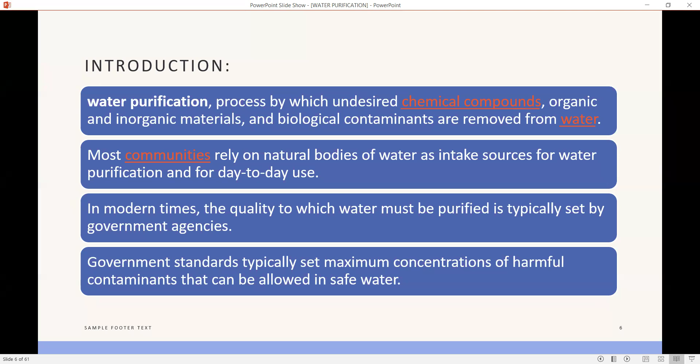Introduction: water purification is the process by which undesired chemical compounds, organic and inorganic material, and biological contaminants are removed from water. Most communities rely on natural bodies of water as the source for purification and for day-to-day use. In modern times, the quality to which water must be purified is typically set by government agencies, which set maximum concentration of harmful contaminants allowed in safe water.

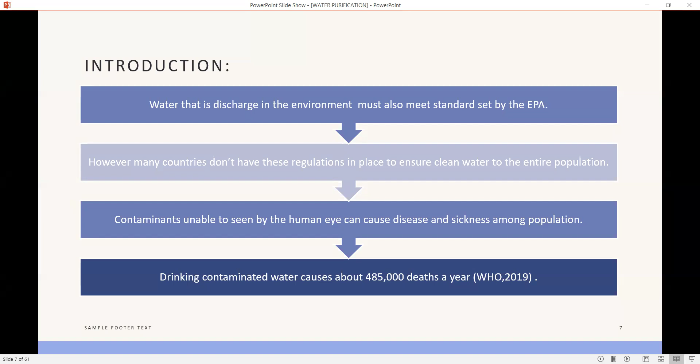Water discharged into the environment must also meet standards set by the EPA. However, many countries do not have these regulations in place to ensure clean water to the entire population. Contaminants unable to be seen by the human eye can cause disease and sickness among the population. Drinking contaminated water causes about 485,000 deaths per year, according to WHO.

Not all people have access to safe drinking water. According to a 2017 report by the United Nations World Health Organization, 2.1 billion people lack access to a safe and reliable drinking water supply at home.

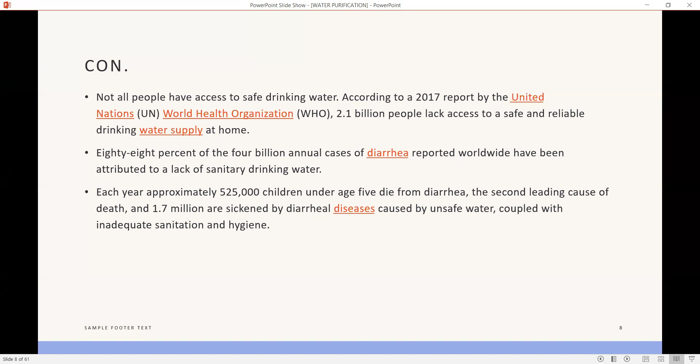88% of the 4 billion annual cases of diarrhea reported worldwide have been attributed to a lack of sanitary drinking water. Each year, approximately 525,000 children under the age of 5 die from diarrhea, the second leading cause of death, and 1.7 million are sickened by diarrheal diseases caused by unsafe water, coupled with inadequate sanitation and hygiene.

So we discussed water purification on a large scale. The traditional methods of access to clean drinking water are crucial for health. That's why municipalities take steps to purify water and weed out any contaminants that can lead to disease.

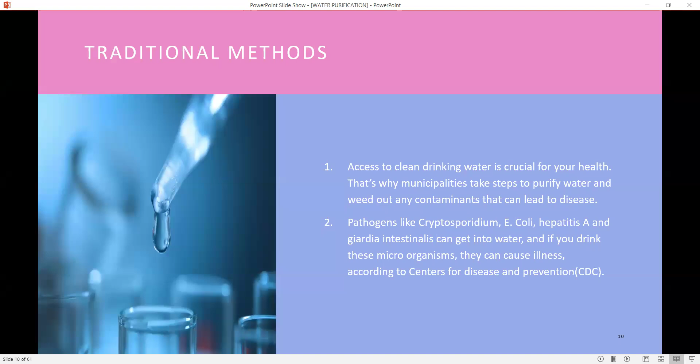Pathogens like Cryptosporidium, E. coli, hepatitis A, and Giardia intestinalis can get into the water, and if you drink that water, it can cause illness, according to the Center for Disease Control and Prevention (CDC).

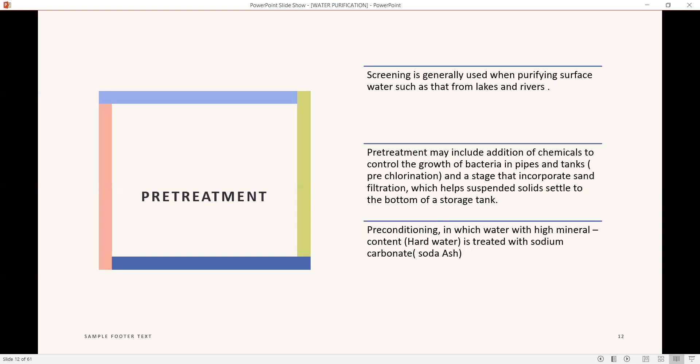Pre-treatment screening is generally used to purify surface water, such as that from lakes and rivers. Pre-treatment may include addition of chemicals to control the growth of bacteria in pipes and tanks. Pre-chlorination and a stage that incorporates sand filtration, which helps suspended solids settle to the bottom of the storage tank. Preconditioning is when water with high mineral content, hard water, is treated with sodium carbonate, soda ash.

Number one is screening. The first step of water treatment is screening, when water from the lake, river, or ground passes through the screen to filter. Initially, wood chips, leaves, aquatic plants, and floating impurities are removed by the screening process. Water often passes through multiple screen systems before proceeding to the rest of the filtration system at the water treatment plant. These steps include drum screen, a rotating cylinder in the flow channel; step screen, with fixed and movable plates across the width of the channel; and static wedge wire screen.

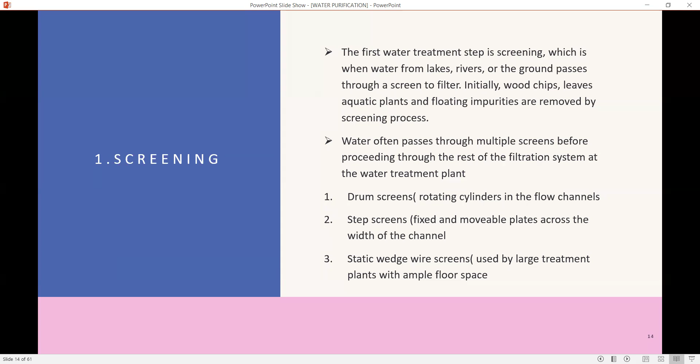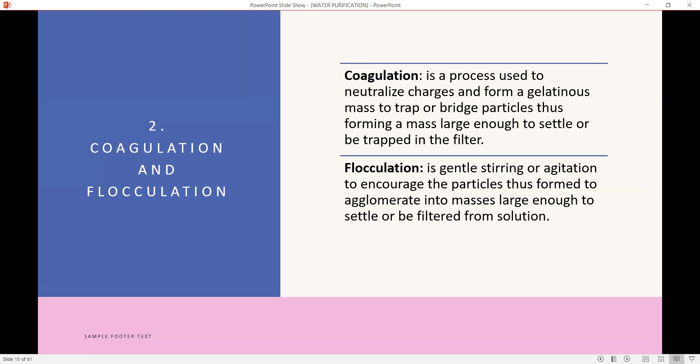The coagulants which are commonly used are iron and aluminium salts such as aluminium sulfate, ferric chloride, or polymers added to water.

Applicability: Flocculation is a conventional pre-treatment method used to separate suspended and dissolved compounds from water in a semi-centralized drinking water treatment plant. Many charged species such as suspended minerals, organics, pathogens, and dissolved species such as metals, phosphate, fluoride, and radionuclides can be separated by this process.

Third step is sedimentation. During this step of water treatment, floccules get big and heavy enough to sink to the bottom of the water tank. According to CDC, a sedimentation tank allows suspended particles to settle out of the water or wastewater as it flows slowly through the tank, providing some degree of purification. Sedimentation rate is increased by increasing the surface area of the tank. A layer of accumulated solid called sludge forms at the bottom of the tank and is periodically removed.

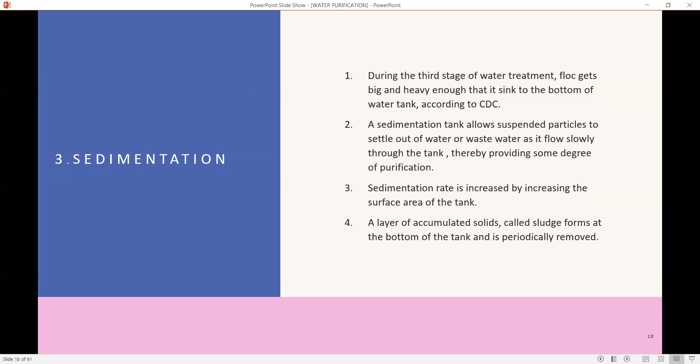Fourth step is filtration. Once the floc settles to the bottom of the tank, the water above it passes through additional filters made of various materials like sand, gravel, and charcoal to remove smaller particles like dust and chemicals. According to CDC, the filters used are rapid sand filter, slow sand filter, and membrane filter. Rapid sand filters filter up to 30 times more rapidly than slow sand filters.

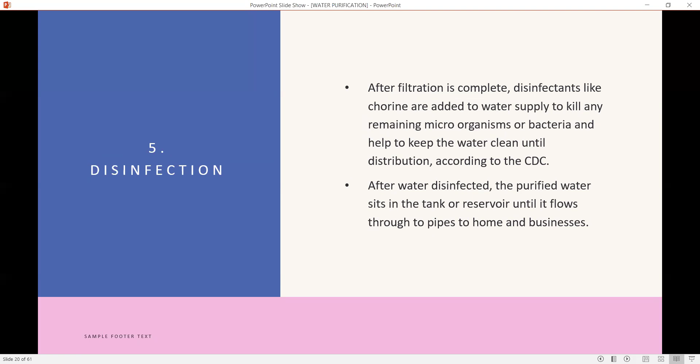Next step is disinfection. After filtration is complete, disinfectants like chlorine are added to the water supply to kill any remaining microorganisms or bacteria, helping keep the water clean until distribution. After disinfection, the purified water sits in a tank or reservoir until it flows through pipes to homes and businesses. Disinfection can be done by chlorine disinfection, chlorine dioxide disinfection, chloramination, ozone disinfection, ultraviolet disinfection, bromination, and iodinization.

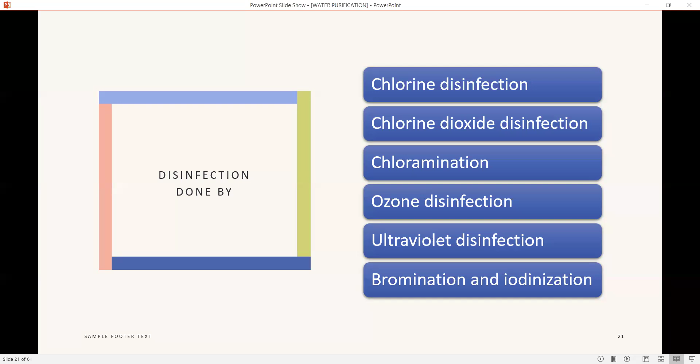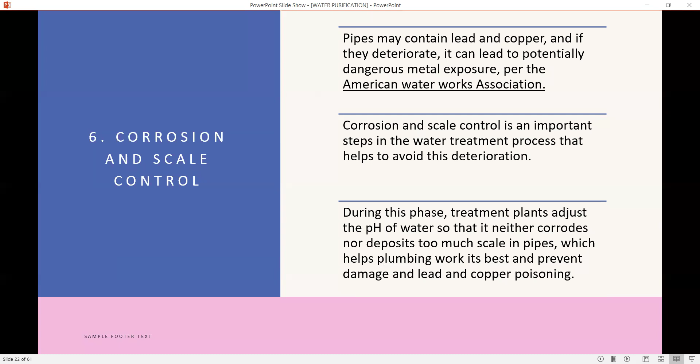Next step is corrosion and scale control. Pipes may contain lead and copper, and if they deteriorate, it can lead to potentially dangerous metal exposure per the American Water Works Association. Corrosion and scale control is an important step that helps avoid deterioration. During this phase, the treatment plant adjusts the pH of the water so that it neither corrodes nor deposits too much scale in the pipe, which helps plumbing work its best and prevents damage and lead and copper poisoning.

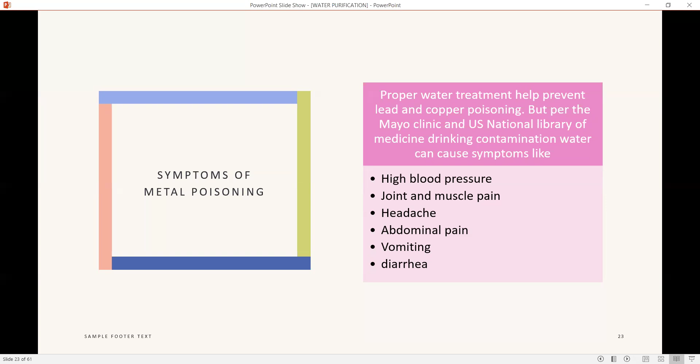So the symptoms of metal poisoning: proper water treatment helps prevent lead and copper poisoning, but per the Mayo Clinic and U.S. National Library of Medicine, drinking contaminated water can cause symptoms like high blood pressure, joint pain, muscle pain, headache, abdominal pain, vomiting, and diarrhea.

Next step is taste and odor. One of the problems involved in water purification is that unpleasant taste and odor may remain in the water, like those from algae. These typically do not pose any health hazard, but most people prefer to do without them. That's why water purification plants remove odor and taste through additional chemical treatment, distillation, or filtration methods, according to the Water Quality Association. This process is called stripping. At this stage, water facilities add fluoride to the water, which helps safely and effectively prevent tooth decay throughout the community.

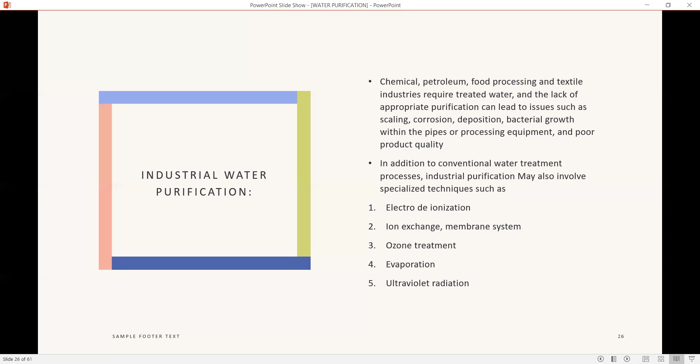Next is industrial water purification. Petroleum, food processing, and textile industries require treated water, and lack of appropriate purification can lead to issues such as scaling, corrosion, deposition, bacterial growth within pipes or processing equipment, and poor product quality. In addition to conventional water treatment processes, industrial purification may also involve specialized techniques such as electro-deionization, ion exchange, membrane systems, ozone treatment, evaporation, and ultraviolet radiation.

Saline water purification: most communities rely on fresh water resources for drinking and domestic water supply. Desalination technology that removes salt and minerals from sea water is emerging to produce potable water suitable for drinking and domestic purposes, including reverse osmosis, vacuum distillation, multi-stage flash distillation, freeze desalination, and electrodialysis, which are gaining importance for salt water purification.

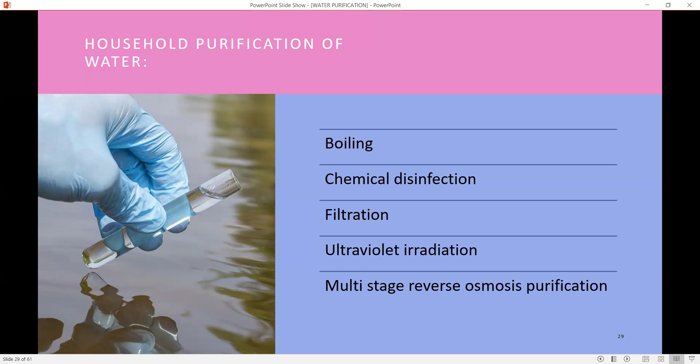Next we will discuss the purification of water on a small scale. Household purification of water includes boiling, chemical disinfection, filtration, ultraviolet irradiation, and multi-stage reverse osmosis purification. When reverse osmosis is not available, there are four water purification methods that can be used to make water safe for drinking: boiling, filtration, distillation, and chlorination. Now we will discuss these one by one.

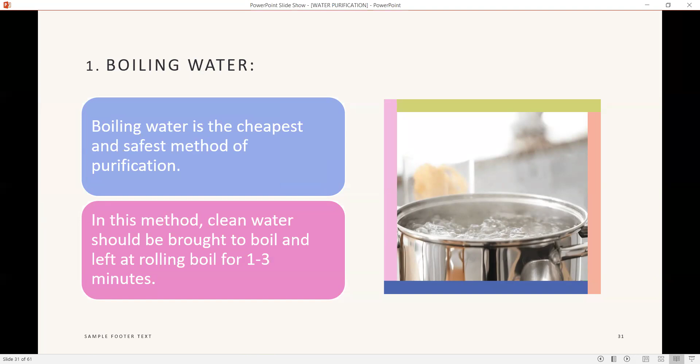Boiling: Boiling water is the cheapest and safest method of purification. In this method, clean water should be brought to a boil and left at a rolling boil for 1 to 3 minutes.

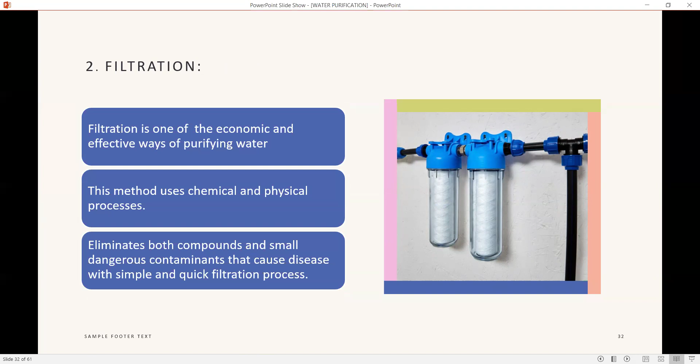Next is filtration. Filtration is one of the economic and effective ways of purifying water. This method uses chemical and physical processes, eliminating both compound and small dangerous contaminants that can cause disease with a simple and quick filtration process.

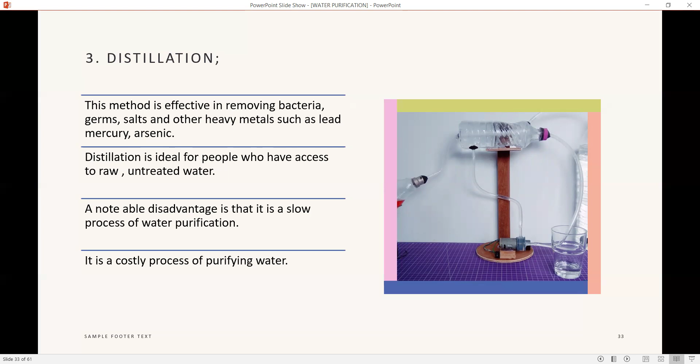So the third one is distillation. This method is effective in removing bacteria, germs, salt, and other heavy metals such as lead, mercury and arsenic. Distillation is ideal for people who have access to raw, untreated water. A notable disadvantage is that it is a very slow and very costly process of purifying water.

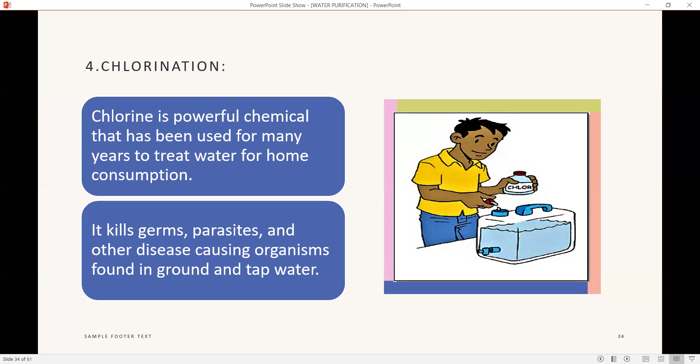Next is chlorination. Chlorine is a powerful chemical that has been used for many years to treat water for home consumption. It kills germs, parasites, and other disease-causing organisms found in ground and tap water.

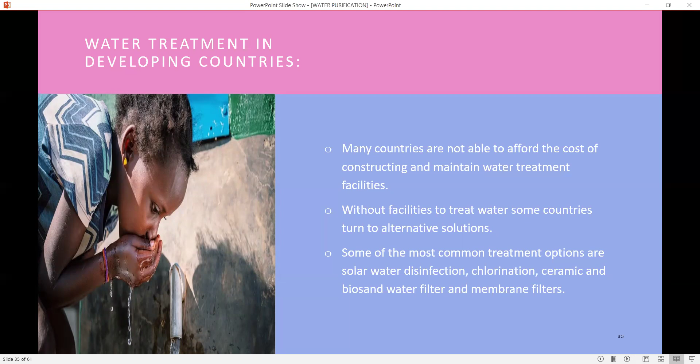Next is water treatment in developing countries. Many countries are not able to afford the cost of constructing and maintaining water treatment facilities. Without facilities to treat water, some countries turn to alternative solutions. Some of the most common treatment options are solar water disinfection, chlorination, ceramic and biosand water filters, and membrane filters.

Next is Pakistan's main water resources. Pakistan's main water sources are surface water, the water from a river, lake, or freshwater wetland, which can be treated using different methods such as an ultrafiltration system or brackish water RO. Desalination can be used for water from an ocean or sea source, which can be treated using a seawater reverse osmosis system and desalination system.

Groundwater or brackish water is the water located in the pore space of soil and rock, such as a borehole well, which can be treated using a reverse osmosis system, chemical dosing, or an ultraviolet water sterilizer. Government water supply, which could have a high level of hardness or high chlorine level, can be treated with a water softener system and media water filters.

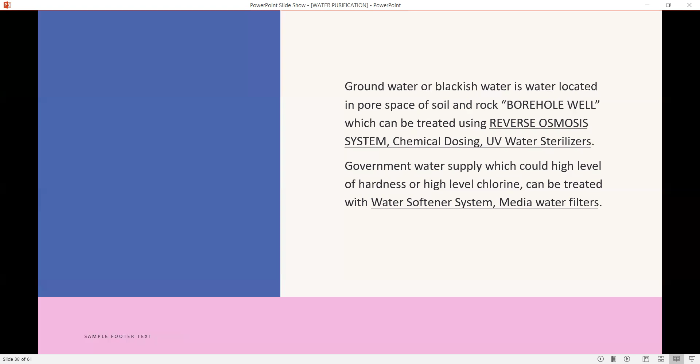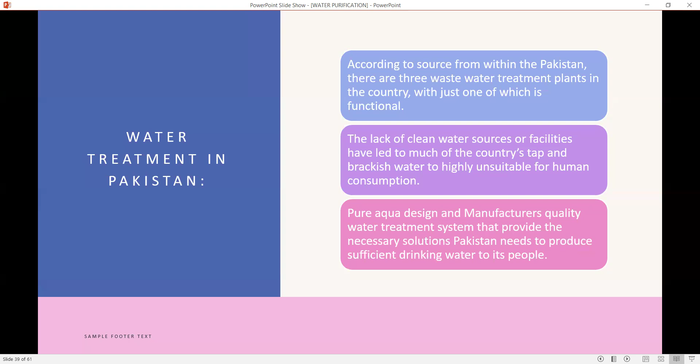According to sources within Pakistan, there are three wastewater treatment plants in the country, with just one of which is functional. The lack of clean water sources or facilities has led much of the country's tap and brackish water to be highly unsuitable for human consumption. Pure Aqua designs and manufactures quality water treatment systems that provide the necessary solution Pakistan needs to produce sufficient drinking water for its people.

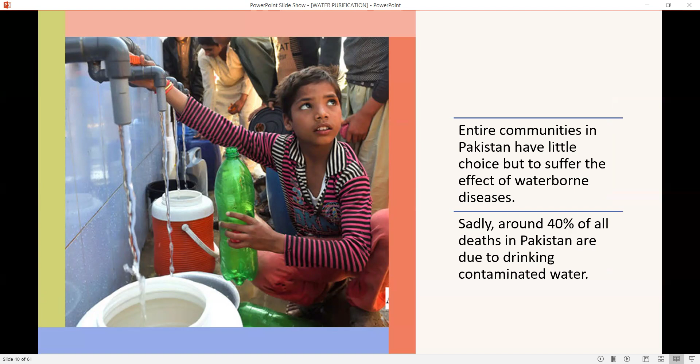Entire communities in Pakistan have little choice but to suffer the effects of waterborne diseases. Sadly, around 40% of all deaths in Pakistan are due to drinking contaminated water. So the strategies that should be applied include filtration plants, solar powered water filtration plants, and water hand pumps.

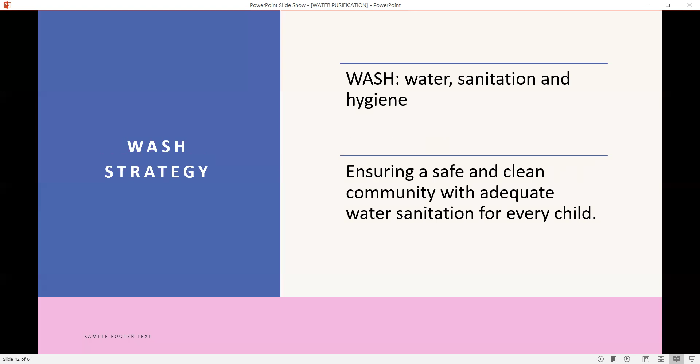WASH strategy. WASH, which is water, sanitation, and hygiene, ensures a safe and clean community with adequate water and sanitation for every child. So the solution to this is ending open defecation. To eliminate open defecation by 2025, UNICEF and partners support the government to implement Pakistan's approach to total sanitation in the country.

Improving quality of water: UNICEF supports the government with the framework to plan, prioritize, and budget for safe water services. The aim is to improve the quality of water supply and ensure access to safe drinking water to the 9% of the population deprived of it.

Next is WASH in schools and health facilities. UNICEF believes in providing students with a healthy learning environment. It employs the globally successful three-star approach in schools to ensure healthy habits such as hand washing among students.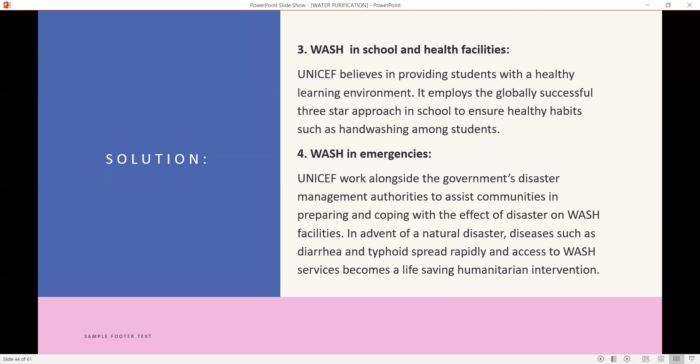WASH in emergencies. UNICEF works alongside the government disaster management authorities to assist communities in preparing for and coping with the effect of disasters on WASH facilities. In the event of a natural disaster, diseases such as diarrhea and typhoid spread rapidly, and access to WASH services becomes a life-saving humanitarian intervention.

Next is the Pakistan Council of Research in Water Resources: Drinking water quality in Pakistan, current status and challenges. Launch of the National Water Quality Monitoring Program Report 2020-21. The findings show that 39% of the monitored water sources were safe. 61% of sources were unsafe for drinking. Microbiological contamination, at 41%, is the primary challenge for water supply agencies.

So next is the recent advances. Water and wastewater treatment in Pakistan: issues, challenges and solutions. Currently Pakistan is able to treat only 1% of its wastewater. Pakistan is far from its commitment under the Sustainable Development Goals to treat up to 50% of the wastewater. The rapid urbanization of cities without corresponding improvement in infrastructure to collect and treat wastewater leads to poor quality water and sanitation. The organizations responsible for wastewater treatment are also responsible for providing quality drinking water, that is WASA, Water and Sanitation Agency.

This results in untreated wastewater being used for irrigation and heavy contamination of ground and surface drinking water, thus leading to disease. Decentralized wastewater treatment plants and nature-based systems need to be introduced to both cities and villages so that the water can be reused in a healthy and sustainable way. Industries are now beginning to adhere to compliance standards, while cities are becoming aware that open drains are not a long-term solution to this problem. In short, Pakistan needs to consider the long-term benefit of wastewater treatment instead of short-term cost and make it a priority.

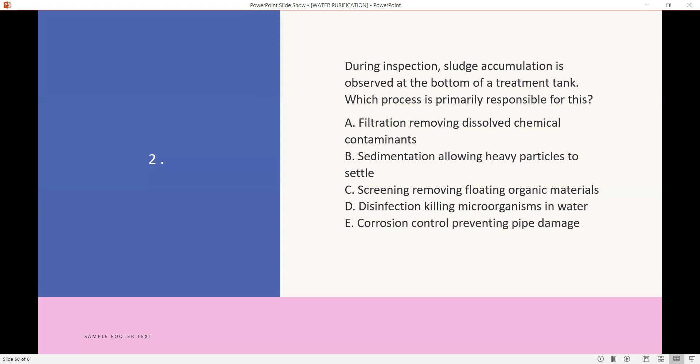MCQ number two: upon inspection, sludge accumulation is observed at the bottom of the tank. Which process is primarily responsible for this? A. Filtration, removing dissolved chemical contaminants. B. Sedimentation, allowing heavy particles to settle. C. Screening, removing floating organic matter. D. Disinfection, killing microorganisms in the water. E. Corrosion control, protecting pipes. B. Yes, B is the right option.

MCQ number three: an industry reports scaling and corrosion in the pipes due to untreated water. Which specialized process is most appropriate? A. Electrodeionization to remove ionic impurities. B. Screening to remove large floating particles. C. Sedimentation to settle suspended solids. D. Boiling to eliminate microbial organisms. E. Filtration to remove visible turbidity. A is the right option.

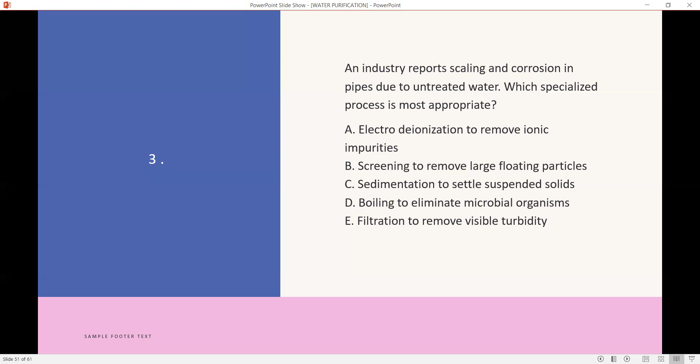MCQ number four: a household without access to an advanced purification system wants to ensure safe drinking water. Which method is most reliable? A. Boiling water to destroy pathogens effectively. B. Screening water through cloth material. C. Settling water for a long duration only. D. Storing water in a covered container. E. Adding flavoring agents to improve taste. A. Yes, A is the right option.

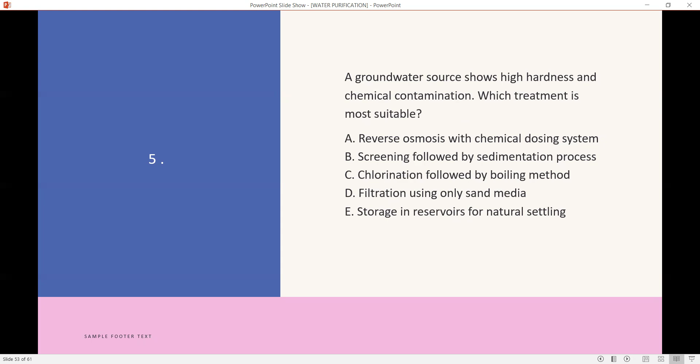MCQ number five: a groundwater source shows high hardness and chemical contamination. Which treatment is most suitable? A. Reverse osmosis with chemical dosing system. B. Screening followed by sedimentation process. C. Chlorination followed by boiling method. D. Filtration using only sand media. E. Storage in reservoir for natural settling. A is the right option.

MCQ number 6: a community reports a diarrhea outbreak despite having a filtration system installed. Investigation shows presence of bacteria in water. What step is missing? A. Screening of raw water at intake point. B. Sedimentation of suspended particles in tank. C. Proper disinfection using chlorination method. D. Coagulation to remove turbidity particles. E. Filtration through rapid sand filters. C is the right option.

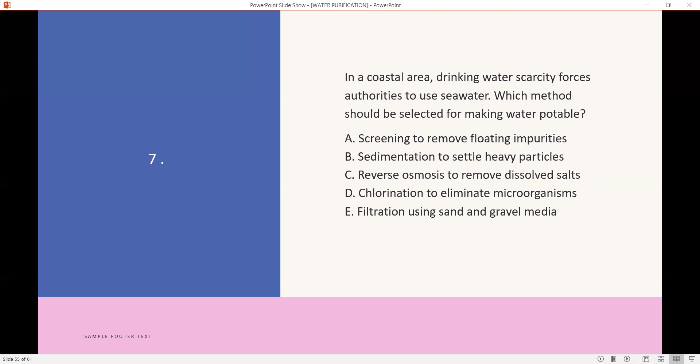MCQ number 7: in a coastal area, drinking water scarcity forces authorities to use seawater. Which method should be selected for making water potable? A. Screening to remove floating impurities. B. Sedimentation to settle heavy particles. C. Reverse osmosis to remove dissolved salts. D. Chlorination to eliminate microorganisms. E. Filtration using sand and gravel media. C. Yes, C is the right option.

MCQ number 8: an industrial plant reports corrosion and scaling in the pipeline due to poor water quality. Which advanced method should be used? A. Screening to remove floating particles. B. Sedimentation to remove heavy solids. C. Electrodeionization to remove ions. D. Filtration to remove suspended matter. E. Chlorination to kill microorganisms. C. Yes, C is the right option.

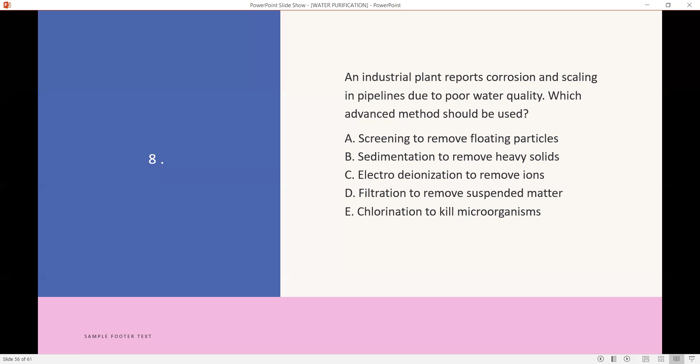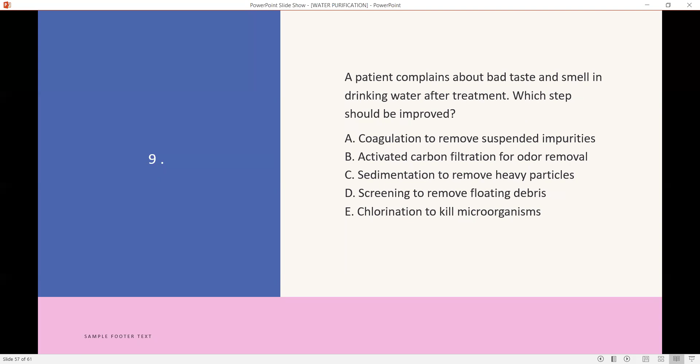MCQ number 9: a patient complains about bad taste and smell of drinking water after treatment. Which step should be improved? A. Coagulation to remove suspended impurities. B. Activated carbon filtration for odor removal. C. Sedimentation to remove heavy particles. D. Screening to remove floating debris. E. Chlorination to kill microorganisms. B. Yes, B is the right option.

MCQ number 10: during flood emergencies, rapid spread of diarrhea and typhoid is observed due to unsafe water. Which intervention is most critical? A. Immediate provision of WASH services. B. Construction of large treatment plants. C. Installation of desalination systems. D. Development of industrial purification. E. Expansion of underground pipelines. A. Yes, A is the right option. This is the MCQs key.